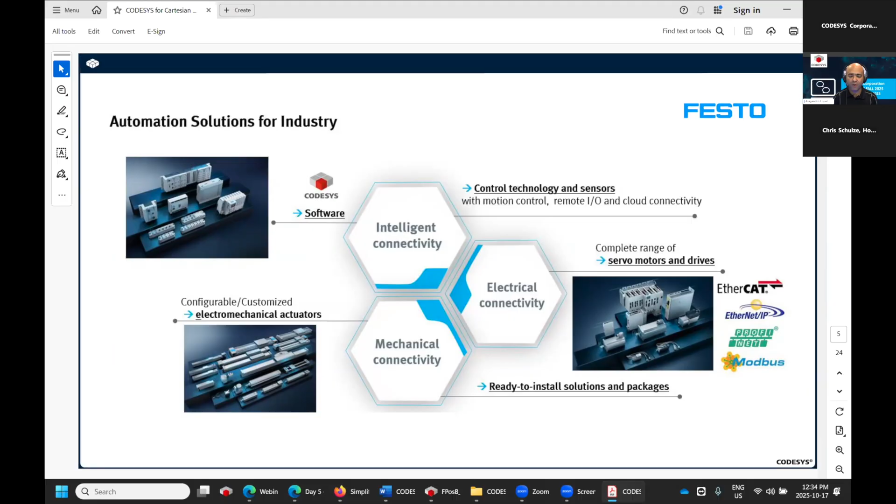And what we're trying to do here with this presentation is to show you that FESTO, because we have so many products everywhere, wants to make sure that everything connects together properly from the mechanical, but also from the controls point of view and the software. And this is what I'm going to show you in a minute.

Now, let's dive into what we call the FESTO motion control platform. The FESTO motion control platform is basically an ecosystem that we've been putting together. This ecosystem is basically a combination of multiple types of technologies. So for standard pick and place operations, where you have in your industry just moving things from point A to point B, soft motion, CAM, more complex applications, sometimes robotic, sometimes soft motion for gluing applications, and also palletizing, CNC.

All these combined is what CODESYS is helping us with. CODESYS is giving us that opportunity to connect from the mechanical components of FESTO up to a sensor level, and also up to the controls and the software development.

Now, when it comes to mechanics, FESTO has a large portfolio that is already well established in the market. We have very good quality products, and without going too far, what I want to mention is that the mechanical pieces of FESTO all connect together. So all the servo drives connect directly with the mechanics, with the gears, with all the bells and whistles. So basically all the mechanical pieces fit very nicely.

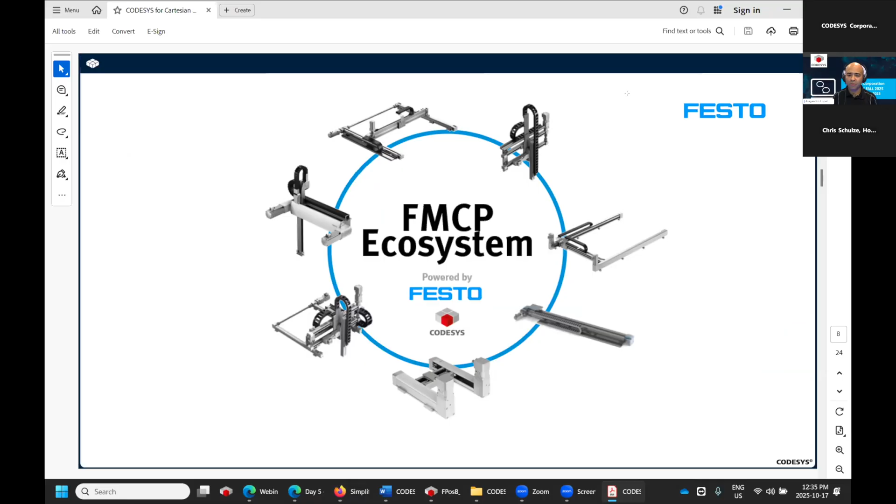So what we wanted to do is put all these together and make it simpler for the customer. So people that are not necessarily very familiar with all this infrastructure behind the scenes for PLC motion control can still be part of it and can still develop things without necessarily being scared. Because once you see this as your path, something that you have to follow in order to make it happen, it's extremely complex. And if you don't do it right, you're going to end up troubleshooting. You're going to end up handling a lot of code, maybe without a reason.

So the whole point of what I'm going to show you is to develop a library that can take care of all this and put it as one single entry point where you can control all this without necessarily knowing all the details.

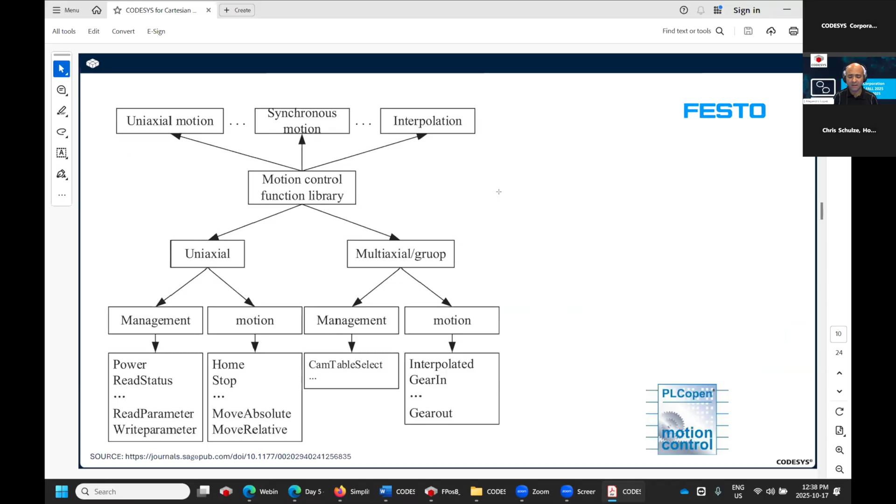So what we tried to do with the FESTO Positioning Basic library, which is what we're going to be talking about here, is act as a simplified bridge between the CODESYS infrastructure and electromechanical systems from FESTO. And this is exactly what the Positioning Basic library is doing for us. It is basically hiding all these different blocks and different connections and making a nice visual entry point where you have everything right in front of you and you can just pick and choose whatever you like. You don't have to start developing code from scratch.

The library is really taking care of probably 70% or 80% of the standard Cartesian applications. And then the rest is really customized based on the application. Some of the key points of our FESTO Positioning Basic library is that you can still reuse function blocks in the backend. In the CODESYS interface, you can still reuse function blocks for all your motion control application.

For example, sometimes you have synchronized motion that you want to run with PLCopen, utilizing our library. You can still run synchronized motion, but you can also run standard simplified single axis motion for a point-to-point application. So the library still allows you to control multiple other areas outside of your standard synchronized motion control. It also includes all the data types and drivers for some specific needs you may have.

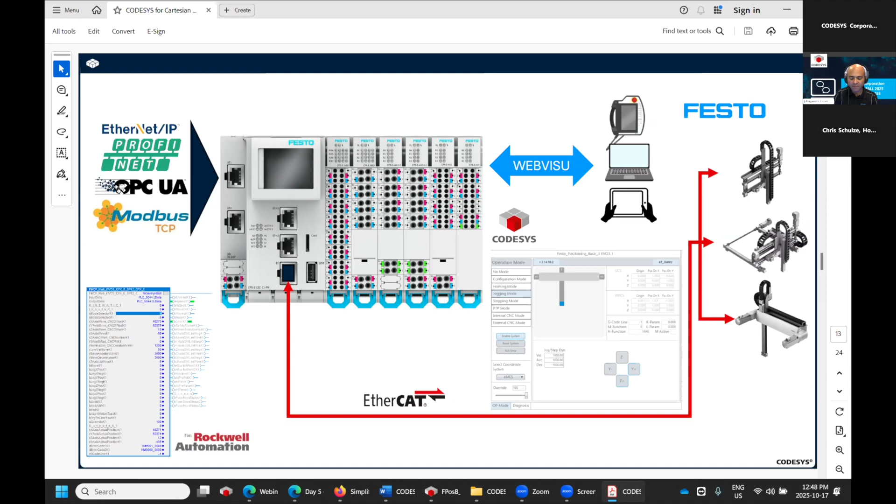Now, this is the general footprint when it comes to multi-kinematics. Multi-kinematics is a key factor here because CODESYS allows us to control multiple gantries in groups, but also it will allow us to communicate upstream. So from a single main PLC, you can control different gantries. All of them are fully isolated.

So for example, the one on the left, you can use it for pick and place, maybe taking a bottle of shampoo from a conveyor and placing it into a box. The one in the middle, because it's a 3D gantry, you could perform a standard CNC path or G-code or even gluing dispensing applications. And the one on the right-hand side is a standard linear Cartesian system. So you can use it for pick and place or maybe just pushing things into a box. I don't know, many other applications that you can use for this.

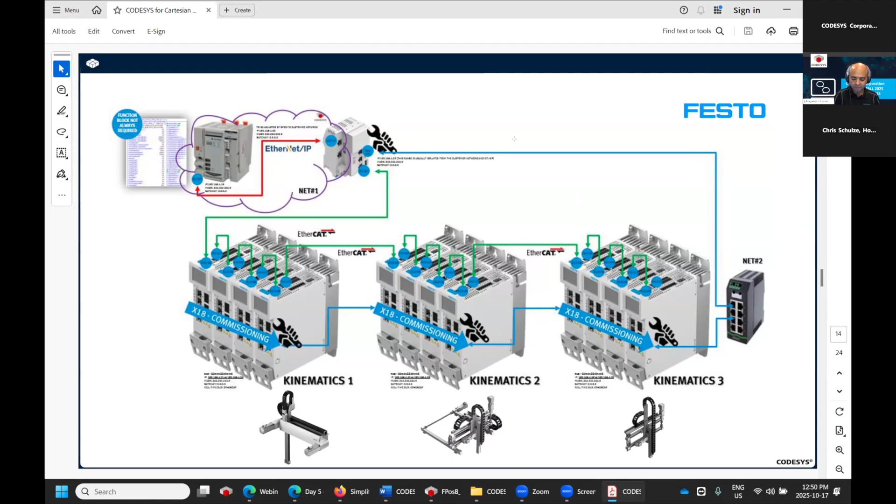Now, this is the typical screen that you will end up with when you start using this library. I will give you more information in a minute, but basically this library will give you all the little push buttons and entry points where you can set up your gantry system from your web browser directly. So you don't necessarily have to develop code in order to run a standard pick and place solution, for example.

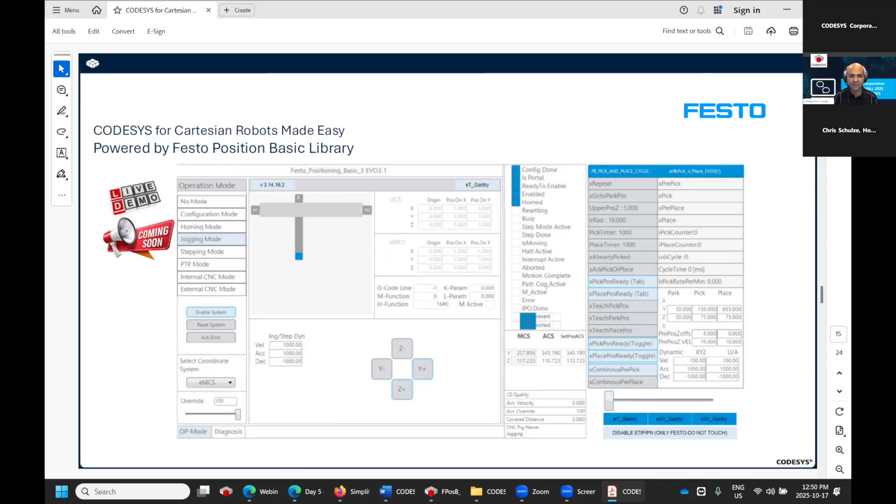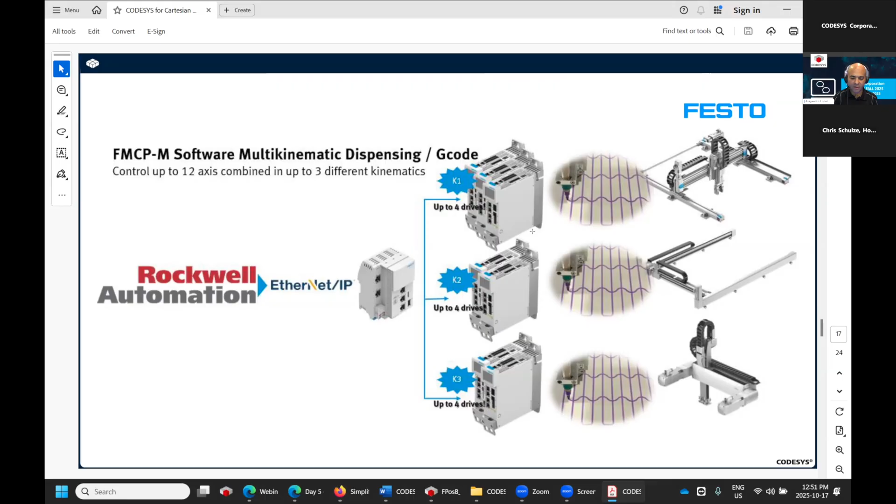So this is when it comes to Rockwell integration, as I mentioned earlier, EtherNet/IP for pick and place. This one is for dispensing applications. For example, following a specific velocity for path following. So you can configure the velocity and you can just run. So the gantry will automatically adapt the acceleration on the corners and things like that. So it will always maintain the same speed all across the path. And this is all because of the CNC editor that is part of the CODESYS solution. This is basically what I wanted to show you when it comes to software.

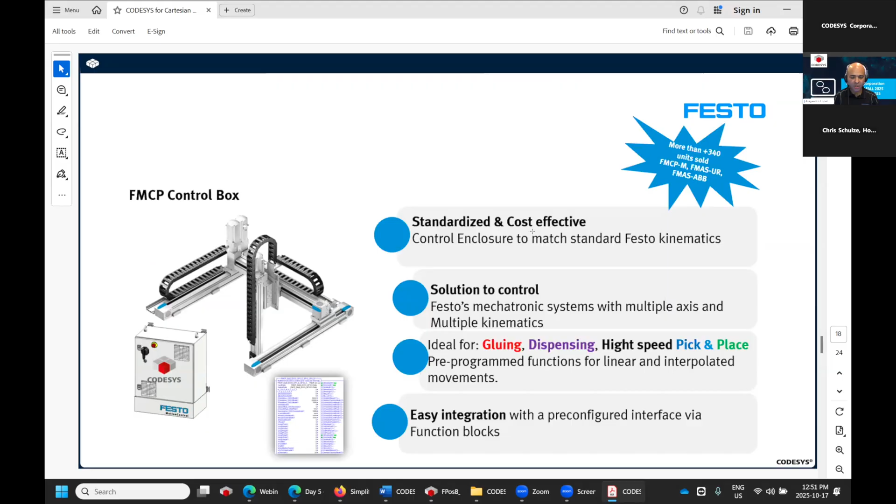Now, when it comes to mechanics, FESTO also offers a control box that basically takes the servo drives, the controller, the PLC, and also the rest of the mechanics and puts it together as one single package. So when it comes to the control box, this is what we also offer in the market. And this is thanks to CODESYS that runs in it; it will help us to expand the whole portfolio, because now the controller can take care of a lot of automation tasks directly inside the control box, still keeping the multi-kinematic system as we like to use.

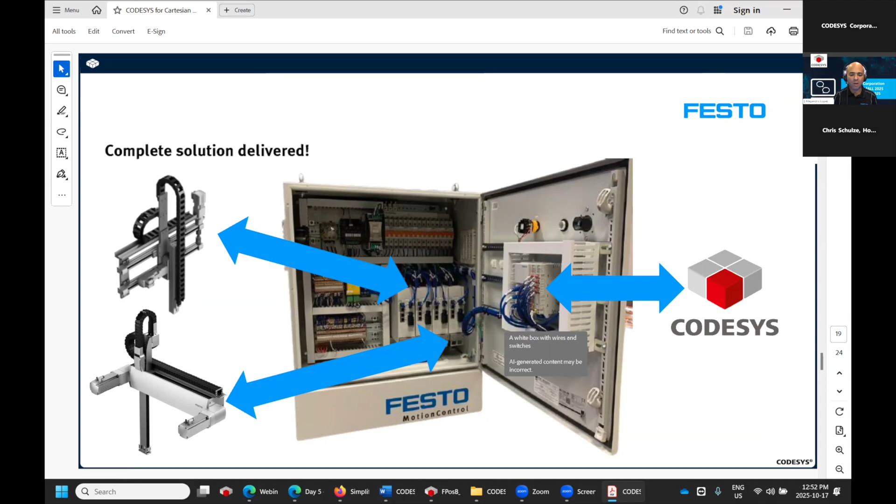So for example, here on the left-hand side, you have 2 servo drives running a linear system and another 2 servo drives running a T-gantry. So from one single box, you can control 2 Cartesian systems. So imagine you are controlling 2 6-axis robots from one single box. That's exactly what it's doing here.

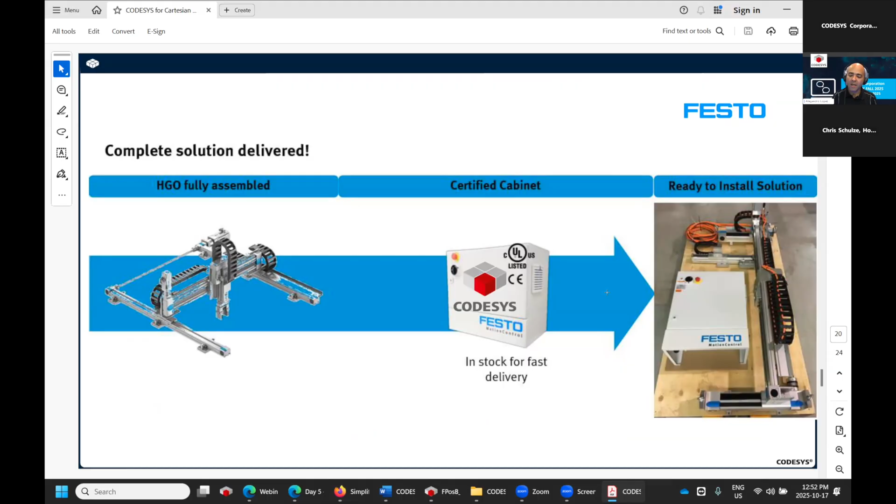And this is what we typically deliver to the market. The Cartesian system, the control box with CODESYS embedded into it in the majority of the cases. In some cases, people don't want to use the CODESYS controller, but if they do, then we still have it. And then the rest comes as one single package.

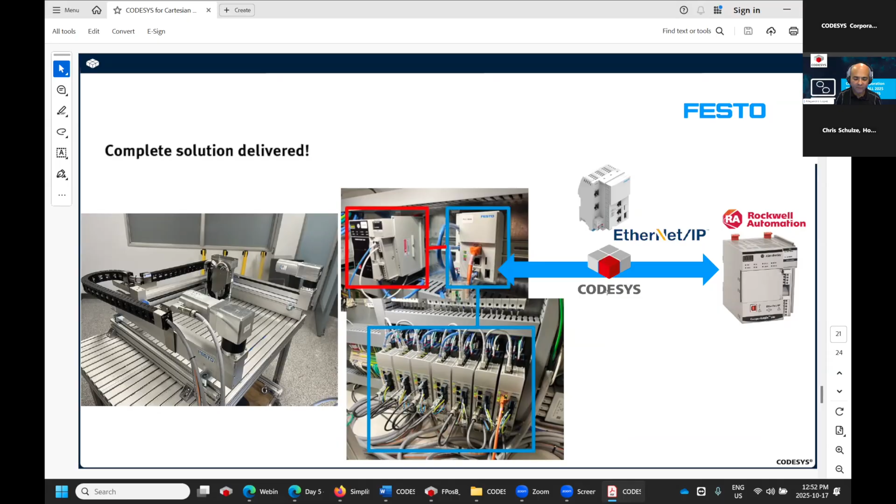This is a typical application that we came across. Rockwell Automation controlling our FESTO PLC, and then the FESTO PLC performing advanced kinematic systems. For example, if you want to run an H gantry, you cannot run this type of gantry with just 2 servo drives. You have to combine everything mathematically. So that's one of the key advantages of using CODESYS.

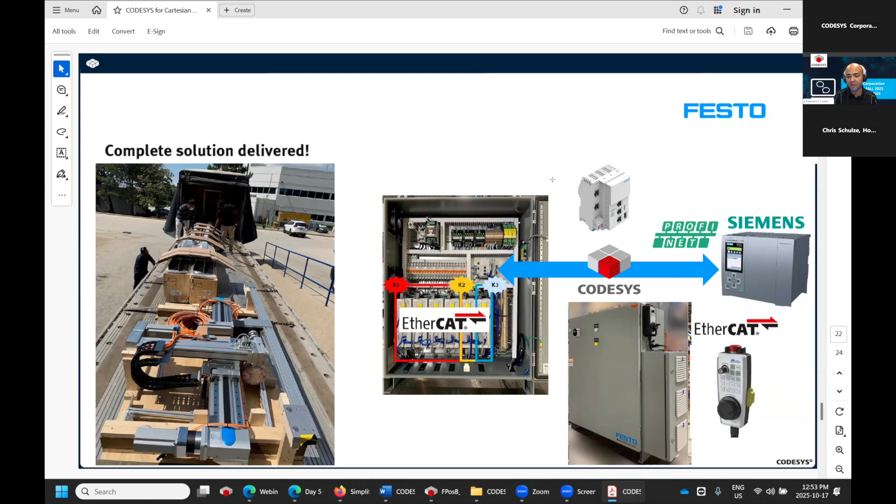And one of the advantages is because we run EtherCAT, I actually found this nice pendant that is kind of the typical CNC pendant that you can just move like a wheel and you have some basic push buttons. That is actually an EtherCAT device that was fully integrated into the standard gantry control. So from there, you don't need a full teach pendant. You actually just need this basic pendant to start jogging the axis and things like that. And because it runs on EtherCAT, the integration was extremely nice.

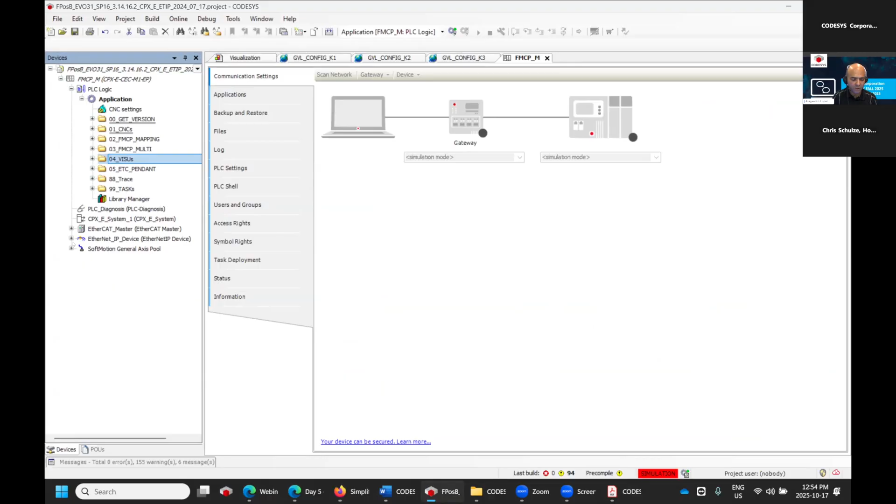It's running, first of all, the EtherNet/IP side, which is here. Through EtherNet/IP, we're mapping all this data for in and out. So this is basically the host connectivity. From here, you can connect to a PLC through EtherNet/IP, a Rockwell PLC or any other. But you can also switch this to PROFINET, and then you're going to end up with the same type of mapping, and then you can communicate with other types of PLCs, such as Siemens.

Here on the left-hand side at the bottom, you're going to see something called a SoftMotion general axis pool. What we've done is this library runs everything on virtual servos, but it could also run physical real servos. So when you want to run some testing applications, something that you want to quickly evaluate, you can use virtual servo drives. But it also runs physical real servo drives. For example, here I just configured 2 Festo servo drives that will allow me to communicate via EtherCAT and utilize all the SoftMotion.

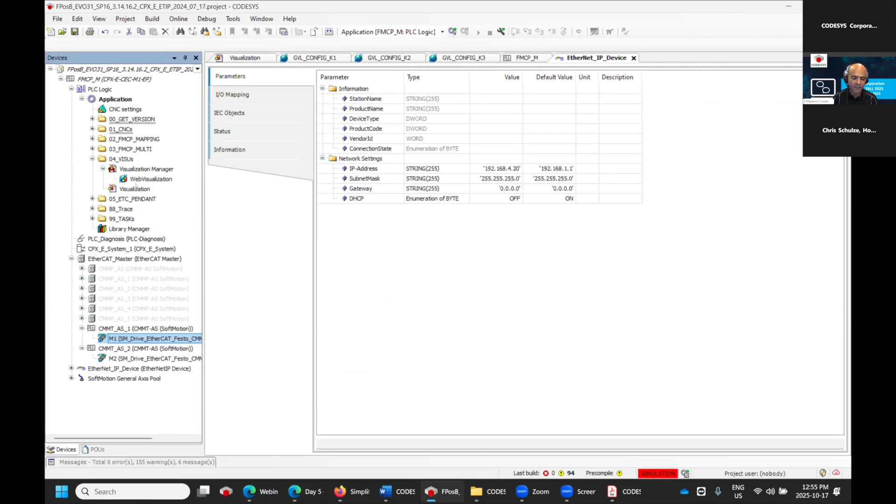And then the library itself, I'm just going to get into the visualization. This visualization will be available in any web browser, as I said. And this visualization, I can run it directly from my controller. Let me just move this a little bit here. I'm just going to download it into my virtual environment. All right. So from here, I have my system running. This is still loading. Just give me a second.

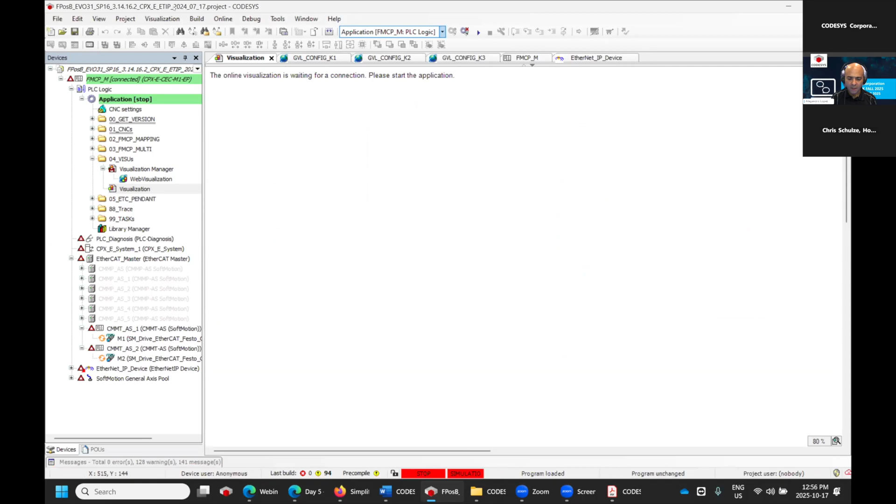So right now, I don't have the physical PLC with me. So I can still run the library, I can still run servos, I can do all my testing, I can run some routines, maybe do some coding, which is nice. It's nice to have that virtualization, which is extremely powerful in CODESYS. And then here I have my system running. Sorry, I'm just going to move this because it doesn't show me. Okay, now I have my system running.

So the first thing I'm going to show you is this push button at the bottom. It's basically isolating all the host connectivity from upstream. So if this is a real controller running kinematics, as soon as I press the button here, I will take control of the entire environment. So from here, I can switch, first of all, between 3 different kinematics. This kinematic is configured with 4 servo drives. This one is also configured with 4 servo drives, and the first one is configured with 2 servo drives. So right now I'm running 3 different kinematics, basically 10 servos altogether from one single entry point.

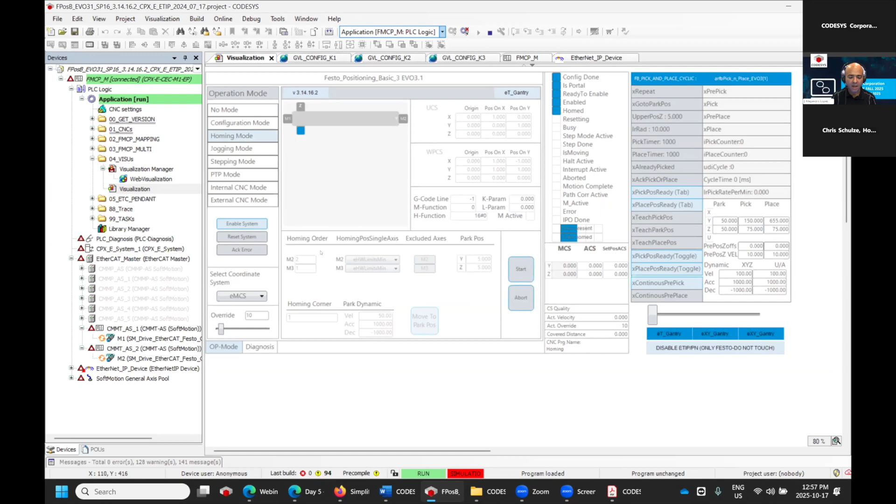And then from here, I can just simulate enabling my system. I can home. This is a T gantry. The way I configured it is a T gantry. So I can home from here. I can also start jogging my device. There is a nice tool here called the override. So here with this slider, I can adjust the velocity of my T gantry. Then I can start jogging. I can also change the velocity for my T gantry. Let me just put a number here.

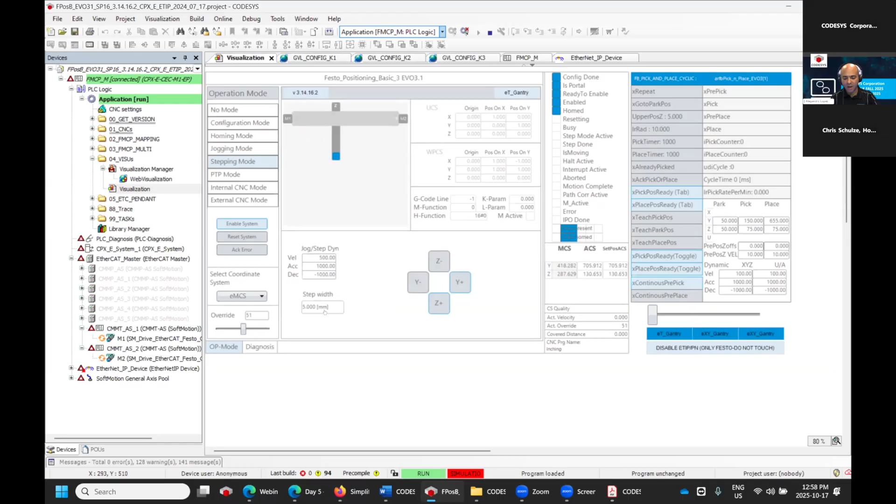So I can increase the velocity now. I can also move my mechanics up and down, left and right. I can also do some stepping mode, which basically tells the system to move this amount, this step width, for example 20 millimeters, and I can just press and it's going to go by 20s. And then I can also do something called point to point, so from here I can just enter the destination I like, the velocity, and then move it.

So now the system is running in 2 Cartesian space. All this, what you see here, all the simulation can be done with a real system in a matter of a click. Instead of virtual, you can switch to real, and then you can start running your Cartesian system.

Chris, I think I only have 30 minutes, so if that's okay, I think I'm going to stop at this point. You don't have to stop, we are free in time, if you need more please take your time. Okay, then I can have 5 minutes more, and then I can show you a little bit more here.

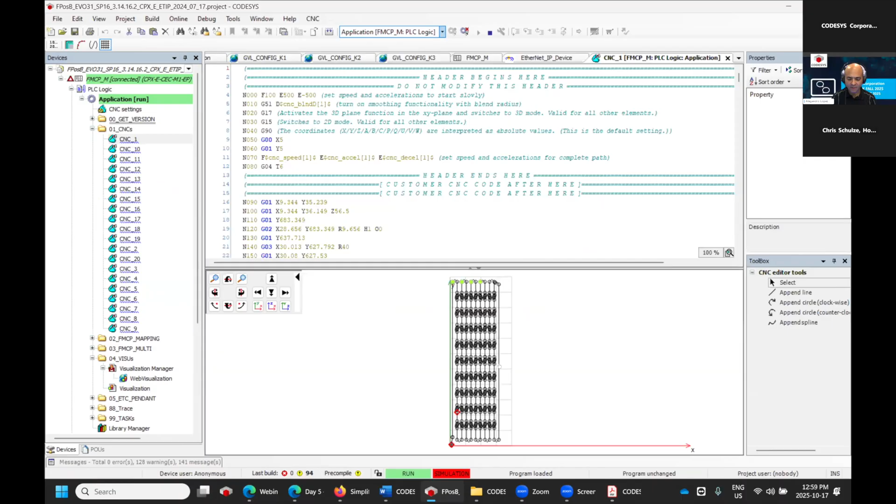So in this virtual environment, for example, I can run CNC mode, or I can run external CNC mode. If you remember, CODESYS already has a CNC interface, so I'm going to search for my CNCs. Just give me a second. I have all these CNCs already loaded in, so for example I can just take this entire G code and run it with my mechanical system. How I do that, I just have to go into my visualization and select which CNC I want to move. From here, I can also call for an external CNC.

Just give me a second, it's kind of waiting... okay, here. I can select an external CNC, so I can go and search for a CNC file. If you have maybe a DXF that you want to convert externally and bring into here, you can also import it.

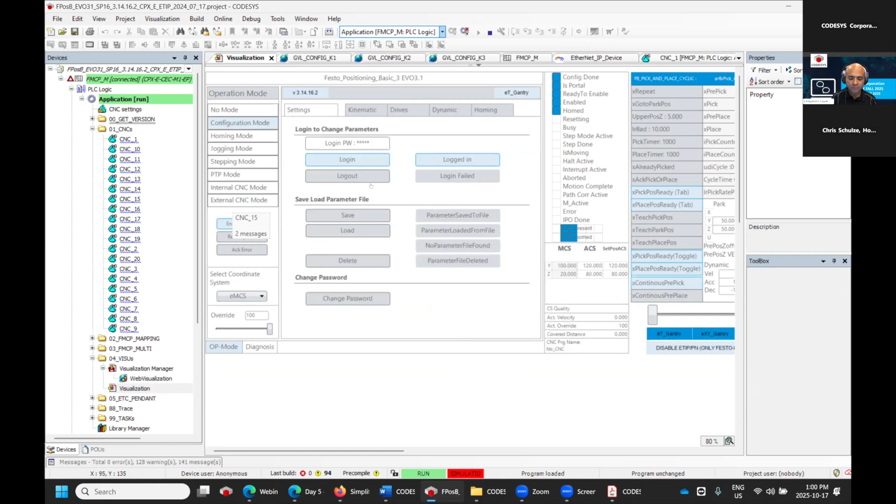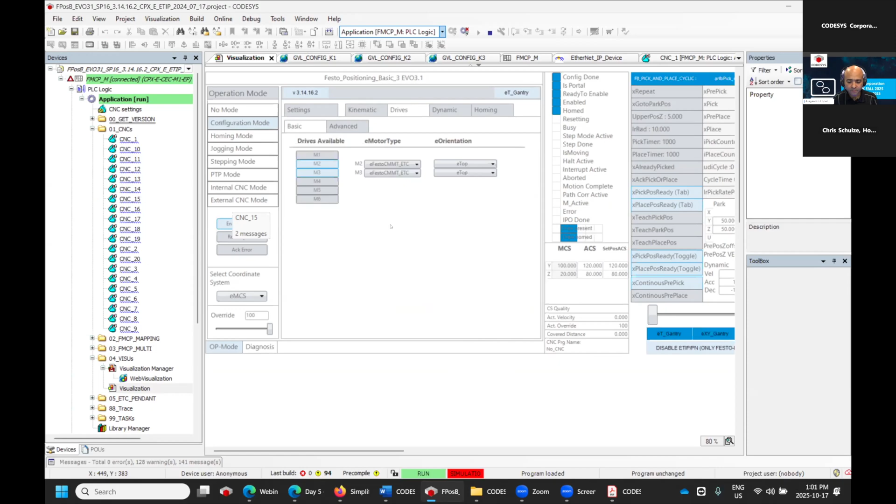Also when it comes to configuration, for example if instead of a T gantry, tomorrow you're going to have a 3D gantry, like a 3-axis gantry, you can go into the configuration mode. By logging into here, you can go and select the kinematic you like. So I can select here an X and Y system, which is a typical Cartesian solution, or you can select an H gantry. By selecting this, now you're switching the entire kinematics inside the library, and it will allow you to switch automatically from 2 servo motors synchronized to up to 3 or 4 servos. You can also select the amount of servo drives you want to use and the orientation. This is very typical in Cartesian systems if you're familiar with them.

You can also select the type of dynamics you like. Some people, for example, don't want to run very fast in one single axis, but want to run the other one the maximum they can, so you can select all that data here. And also the type of homing—if you're familiar with electromechanical systems, you always have to select what type of homing you like: mechanical stop, a sensor, a stop and sensor, all those typical PLCopen MC home type of homing methods. So you can select that too here, for example if you want to use a limit switch, negative limit switch, or positive limit switch. All that is established directly in the library, so you don't have to really go deep in the code in order to make your system work.

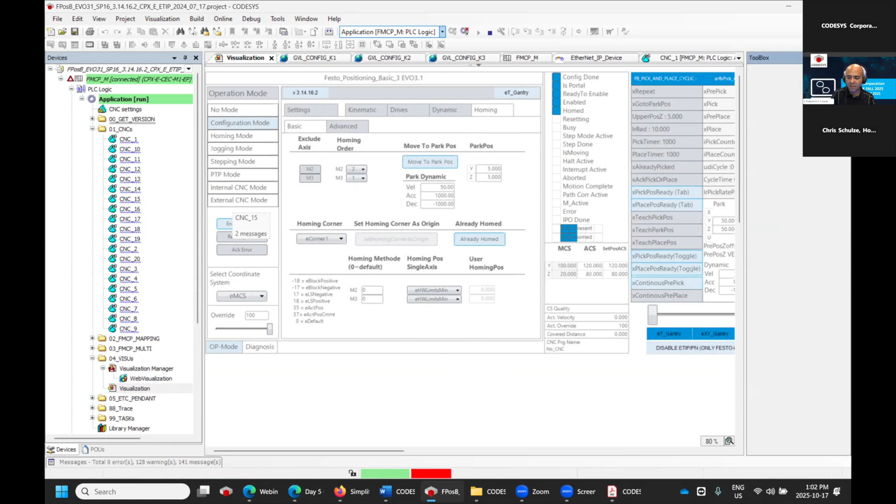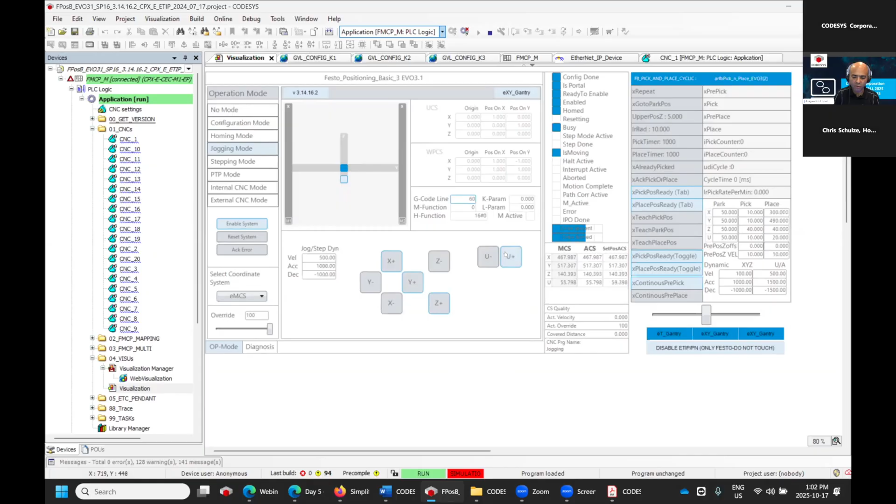But let's say for now I don't want to touch this kinematic system, I'm going to switch to the second kinematic. Now I have my 4 axis ready to go. I can just go here, enable my system, and go into the jogging. So here I have an X and Y gantry, so I can start jogging. Let me just increase the velocity, so I can start increasing now the jogging. I can jog left and right, up and down. With my mechanical system, I can also rotate if I want to, because I have 4 servos in this case.

And I can also switch to my third kinematic, which is still running in the background. Now I can enable my system and also go again to the jogging. This one is also an X and Y with 4 servos, so I can start jogging. As you can see, they are fully independent, fully isolated. So now I can start jogging this and this. As you can see, I'm running 3 different kinematics, all connected to one single PLC controller, and I also have host connectivity, in this particular case, through Ethernet IP.

Chris, I think I'm good for now. I will be looking forward to the questions.